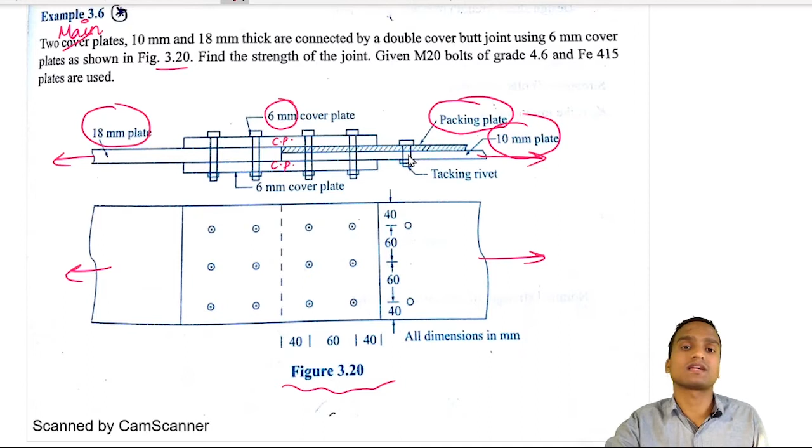The thickness of the cover plate is 6 mm, and the main plate thickness is 18 mm and 10 mm. Since there is a difference in thickness of the main plates, to connect them we have to use a packing plate, as in this special type of joint. The thickness of packing plate, TPK, will be equal to 18 minus 10, which is 8 mm, greater than 6 mm as per the code's recommendation. So we have to apply the factor beta TPK.

This is about the packing plate and the reduction factor which we have to incorporate on the shear capacity of the bolted connection. Now you have to see there are two rows of bolts with 3 bolts in each row, so we have to multiply the design strength of one bolt, which is the minimum of bearing and shearing, with the total number of bolts, that is 6. You have to see all the parameter values given here: 40 is the end distance, this is the pitch, this is the gauge.

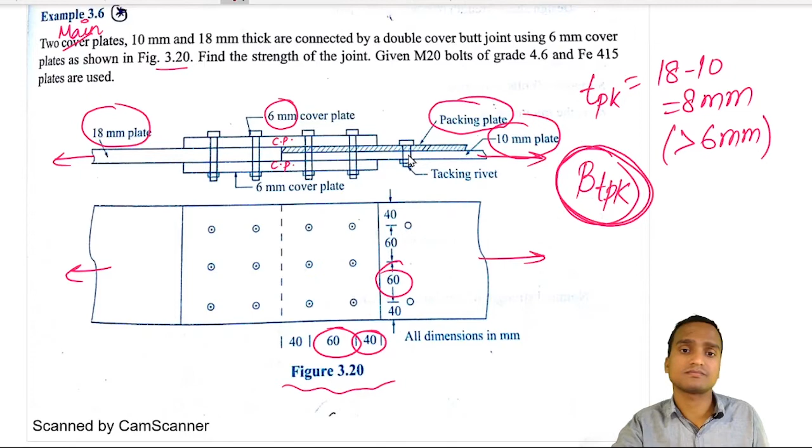After taking this 8 mm thick packing plate, we have to calculate the reduction factor beta pk, given by this formula of the IS code. We multiply it here, reduce it from 1, and it comes out to be 0.9. This beta pk will be multiplied into the formula of shear capacity of the bolt.

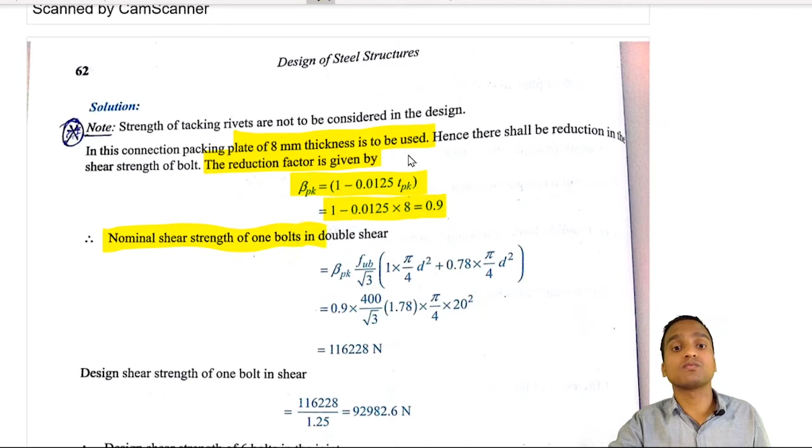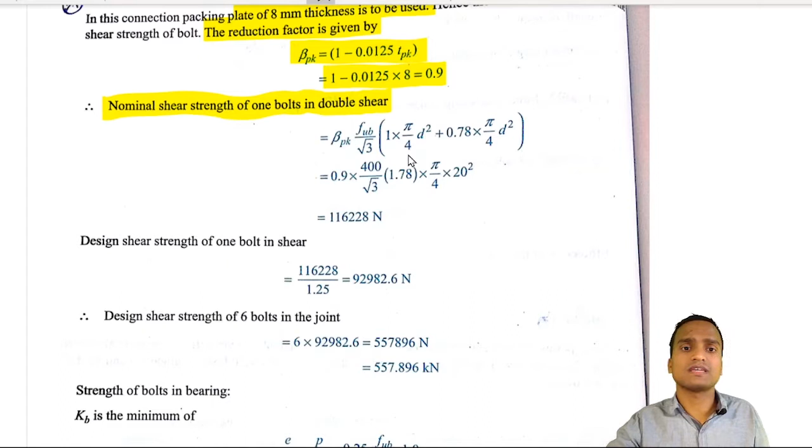Now let us calculate the nominal shear strength of one bolt in double shear. It is not given in the question as such, but you can assume that one shear plane lies in the shank area and one shear plane lies in the threaded area. The same assumption is used here, and VNSF is calculated accordingly with beta pk.

This VNSF is multiplied with beta pk, because we have put beta Lj equal to 1 and beta Lg equal to 1, since for long joints or large grip length these values are not given, so we just put them equal to 1. But we multiply it with beta pk, which is 0.9, and this is multiplied by FUB by root 3 into NN ANB plus NS ASB. So it becomes 0.9 into 400 by root 3 into 1.78 pi d square by 4, which gives this value of VNSF.

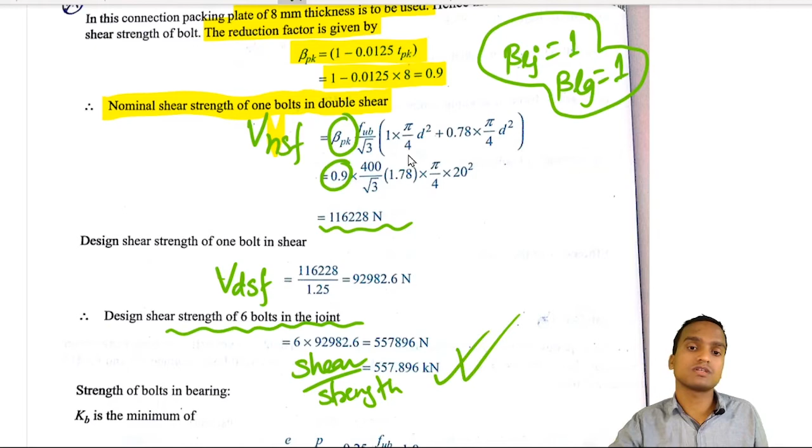This is the nominal shear capacity of one bolt, and we have to divide it by the partial safety factor to get VDSF, the design shear strength of the bolt, then multiply it by the 6 bolts in the joint to get the total shear strength of the joint in shearing. Obtaining this value is not very difficult.

Now we have to calculate the bearing strength of the joint, the bearing capacity of the joint. First we have to calculate the value of kb, which is the minimum of four values. When we put all these values into the four different expressions, the minimum value kb comes out to be 0.606.

We can easily put this into the nominal strength of one bolt in bearing, which is equal to 2.5 kb d t into fu, where fu is fub here. Although here 410 is used, I would suggest using 400 only. We put all the values: 2.5 kb is 0.606, d is the diameter of the bolt, t is the thickness of plate. Now why have we taken the thickness of plate equal to 10 mm?

Because we have to take the minimum thickness of plate. I have told you, if there are two plates of different thickness, then you choose the minimum thickness of plate, because the minimum thickness will give you minimum strength, and this is what you want. You don't want larger strength, you want to determine minimum strength, because the thicker plate will not fail, it will be the thinner plate who will be failing. That's why we have taken the value of thickness equal to 10 mm.

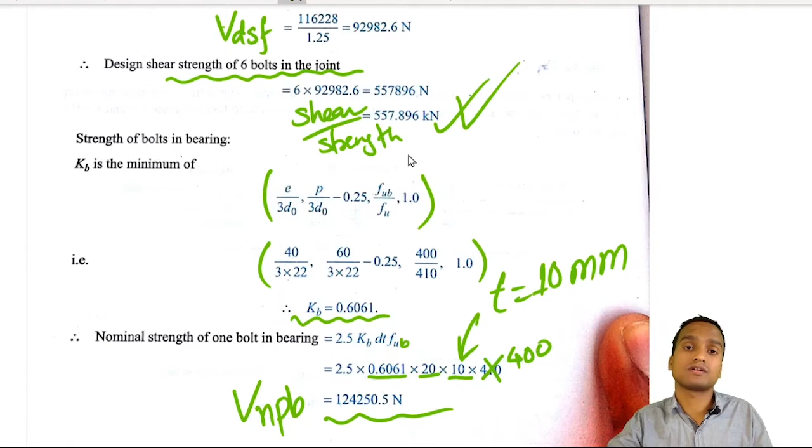Now this is for only one bolt, and also we have to calculate the design bearing capacity of bolt. It is obtained by dividing it by partial safety factor and then multiplying it with the total number of bolts. So this is done, and this is written in kilonewton.

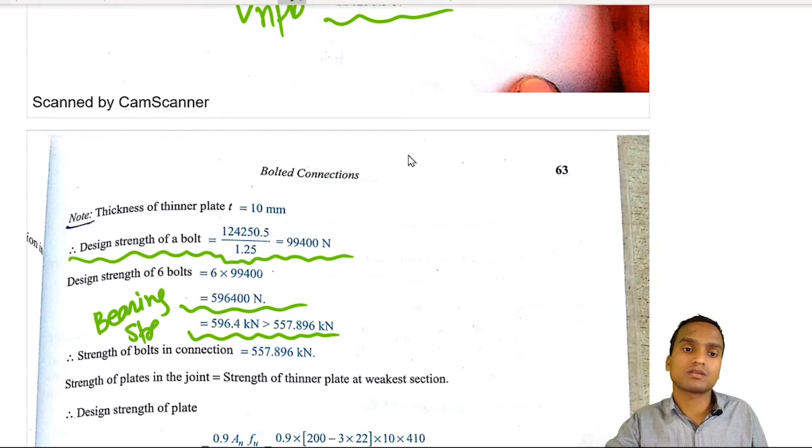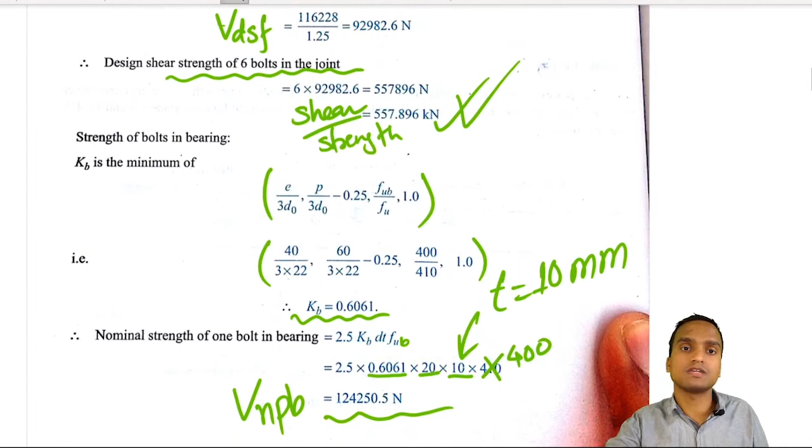Now this is the value of design bearing strength of joint. If you see bearing strength of joint and shearing strength of joint, there is not much difference, but shearing strength of joint is equal to 557 and bearing strength of joint is 596.

So from the comparison we arrive that strength of bolts in connection will be minimum of the two, and it is equal to 557.896 kilonewton. So this becomes the strength of the bolted connections.

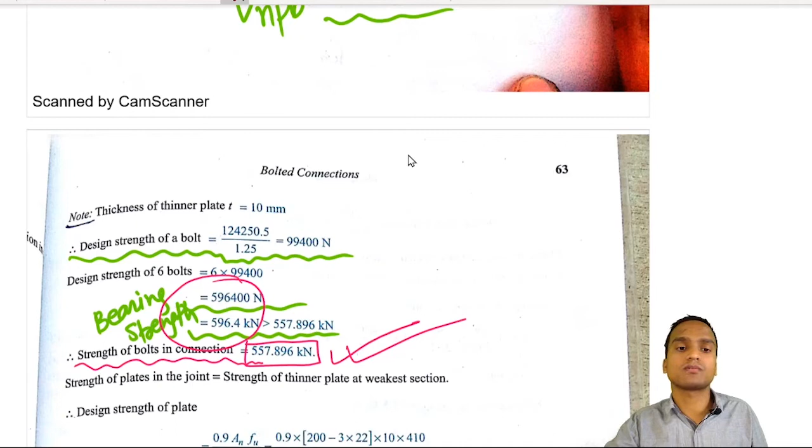Now we have to also calculate the strength of plates in the joint, and the design strength of plate will be equal to TDN. So let us calculate TDN, and TDN is equal to 0.9 AN FU by gamma m.

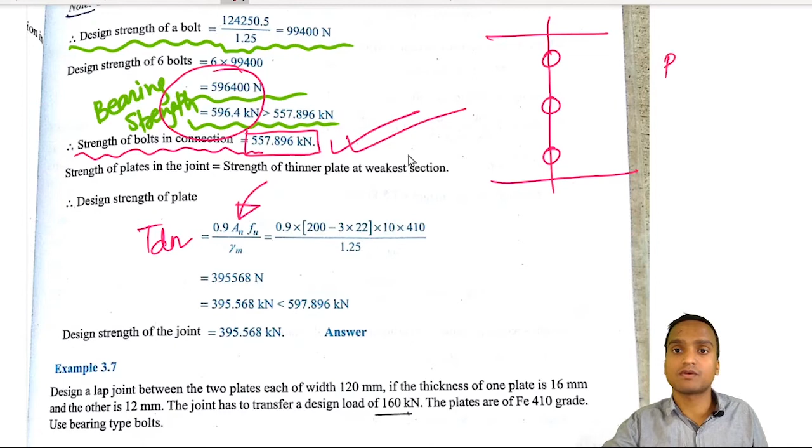Now calculation of this net area of plate is very important, because there are 3 holes done in the plate in one row. So this is a chain bolting, so we will use directly the formula B minus N DH multiplied by the thickness of plate, and here thickness will again be the minimum thickness, that is equal to 10 mm.

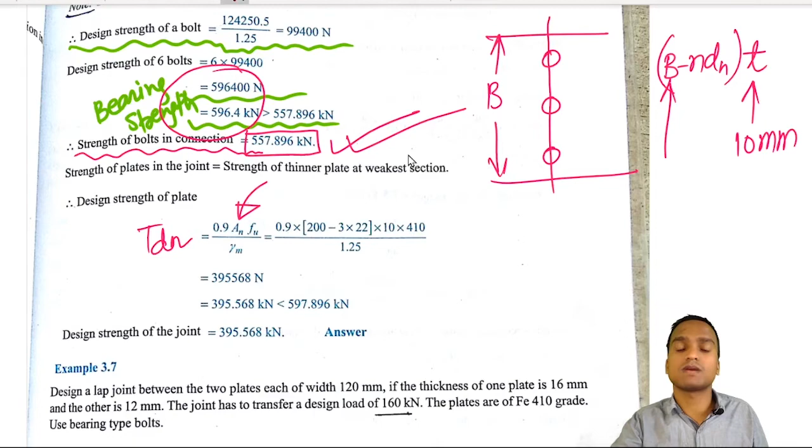And this width B value, how to calculate this value of B? This value of B is given in the question itself. You can obtain this by doing the summation of all these 4 values, and when you do this you arrive at B equal to 40 plus 60 plus 60 plus 40, which is equal to 200 mm. So width of plate is already given.

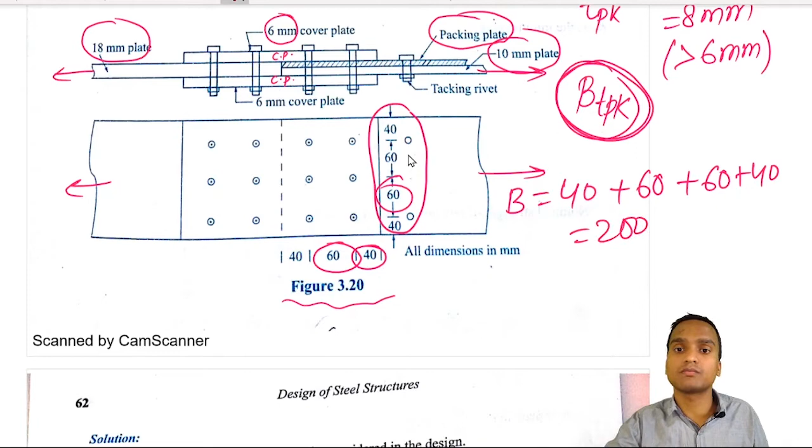Now we have done here B minus N, where N is the number of holes. So B is equal to 200 and N is 3 holes. And what is the diameter of hole? Diameter of hole will be 22 mm, because this is M20 bolt, and we multiply it by 10. So this is my AN value, and the same value is written here. I hope this is clear to you.

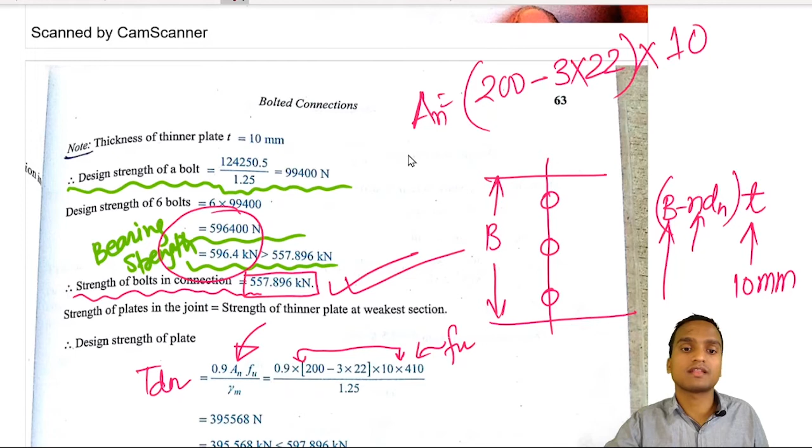And this is the value of FU of plate, not of the bolt, and this is divided by gamma m 1.25, and then you get the design strength of plate.

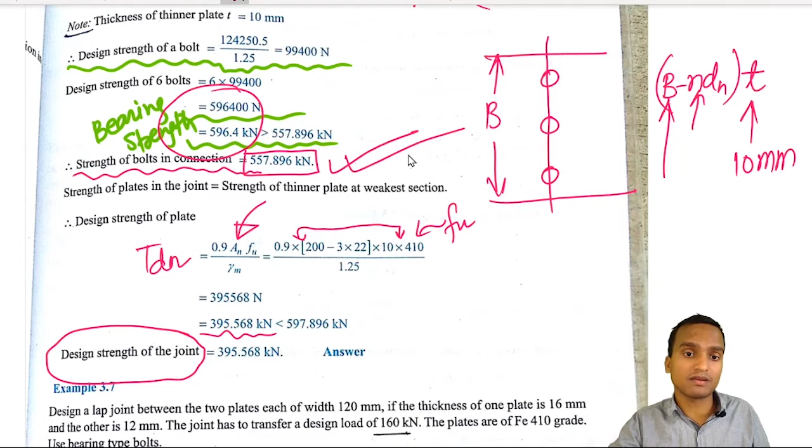Now the design strength of joint will be the minimum of design strength of plate and the design strength of bolt. So if we do a comparison between this 557 and 395, we arrive that it is minimum, so this becomes the strength of joint.

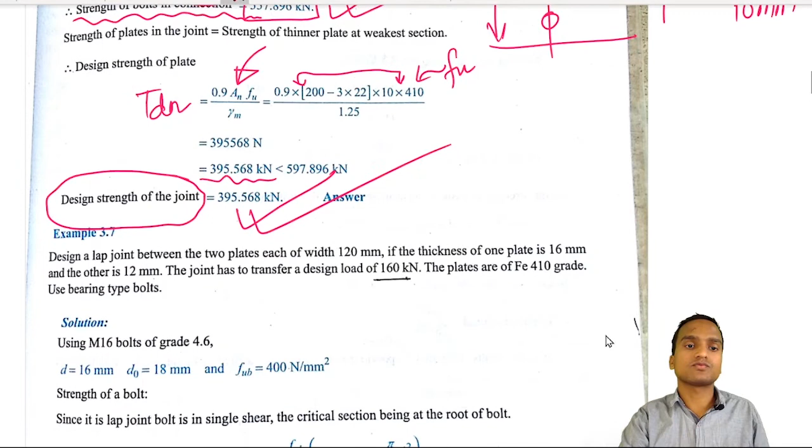Okay, now let us come to our second numerical, and in that it is asked to design a lap joint between 2 plates each of width 120 millimeter, and thickness of one plate is 16 mm and the other is 12 mm.

Now this type of joint is a lap joint. So in lap joint you provide one plate like this and other plate like this, and there is no use of cover plate as such. So you can directly do the punching work and provide the holes and then provide nut and bolts here. So this is what is done in the lap joints.

So here in this case, although the thickness of plates are different, this is a 16 mm thick plate and this is a 12 mm thick plate, do not ask me to use packing plate here again, because packing plate will be used in butt joint, not in the lap joint.

Now the joint has to transfer a design load of 160 kilonewton, this should be the design load. The plates are of Fe 410 grade. Use bearing type bolts. Now it is also given, although it comes in the solution, that we are using M16 bolts of grade 4.6, or you can assume also, because this is a design problem, isn't it? Because here it is asked to design a lap joint.

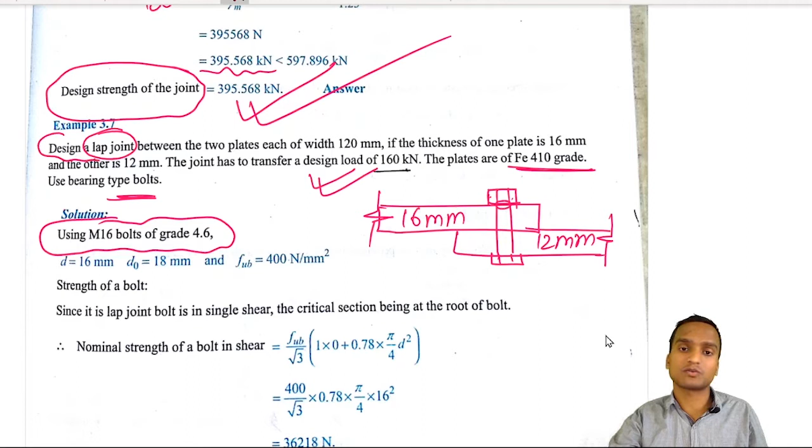So how many types of problem can be?

It can be two types of problem: analysis problem, in which everything is given, you just have to analyze it and calculate the capacity of joint. Second type of problem can be design type, and in that you will be given the design load and you have to design the joint. It depends on you what type of bolt you want to use, what grade and what diameter bolt and what gauge and pitch you want to provide.

It depends on you. So in this case we have just directly used M16 bolts of grade 4.6. So diameter D is 16 mm, D naught is 18 mm and FUB is 400 Newton per mm square. All these things should be clear by now, so I am going a little fast.

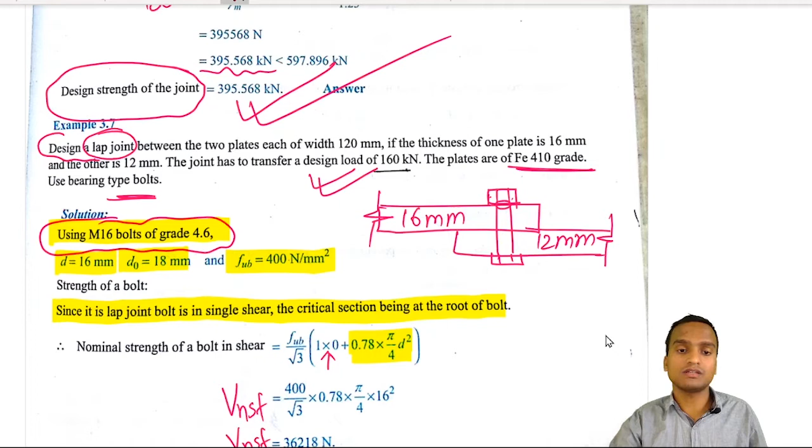Since it is a lap joint, the bolt is in single shear, and the critical section is at the root of the bolt. Normally we assume that the critical section lies in the threaded portion, because the threaded portion is weaker. That's why we put 0.78 pi d square by 4, and area of shank region is put directly to 0, because this is single shear, and this is the value of VNSF, calculated in Newton. Now after calculating it, we have to calculate design shear strength. This is the design shear strength of one bolt.

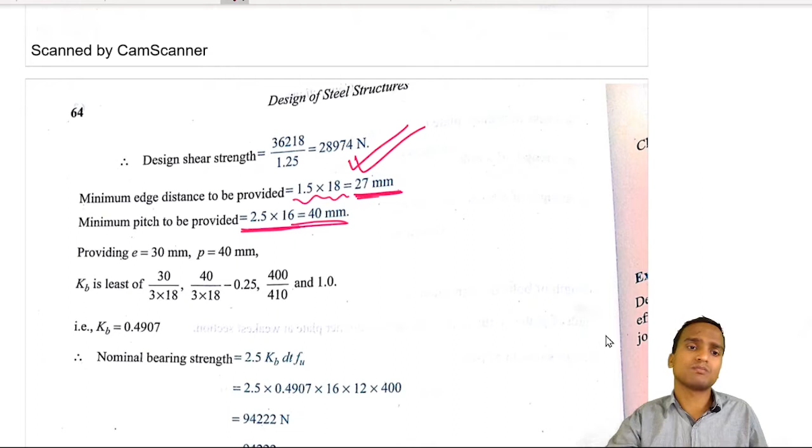Now from the detailing we can take minimum edge distance that we have to provide as 1.5 D, which comes out to be 27 mm, and minimum pitch to be provided is 2.5 D, which comes out to be 40 mm. This comes by experience also.

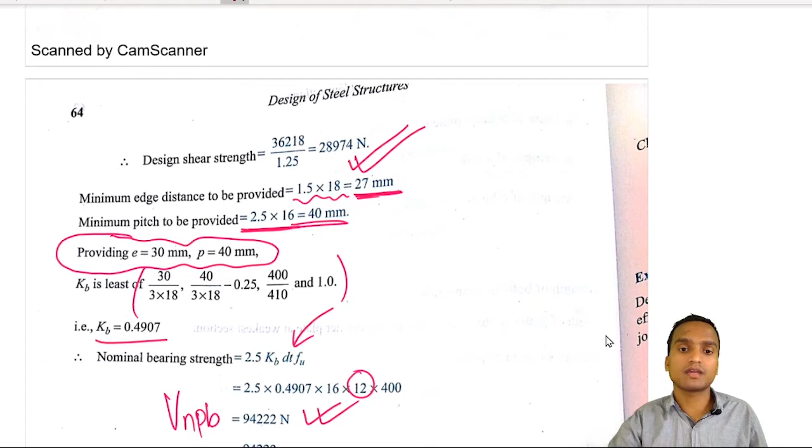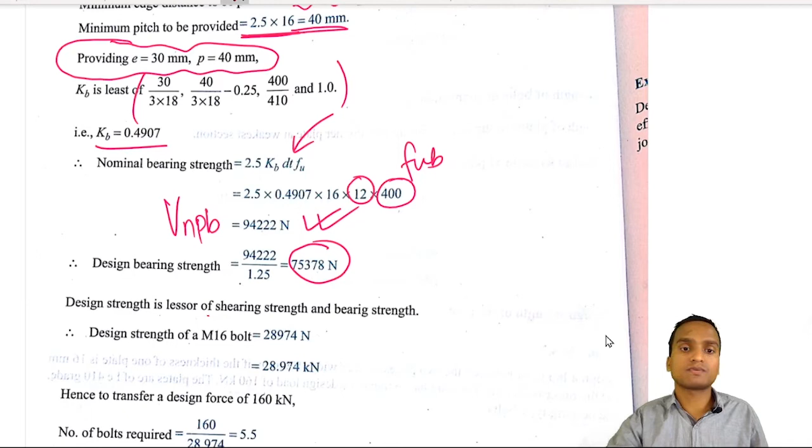So if we provide this value of end distance and pitch, then the value of bearing strength can be obtained. First of all we have to calculate the value of KB. KB is minimum of these four values, which comes out to be 0.49, and when we calculate VNPB, it comes out to be this, using the minimum thickness of plate, that is equal to 12 mm, and FU is the FUB here. So design bearing strength of one bolt is also calculated, and the minimum of shearing strength and bearing strength comes out to be this.

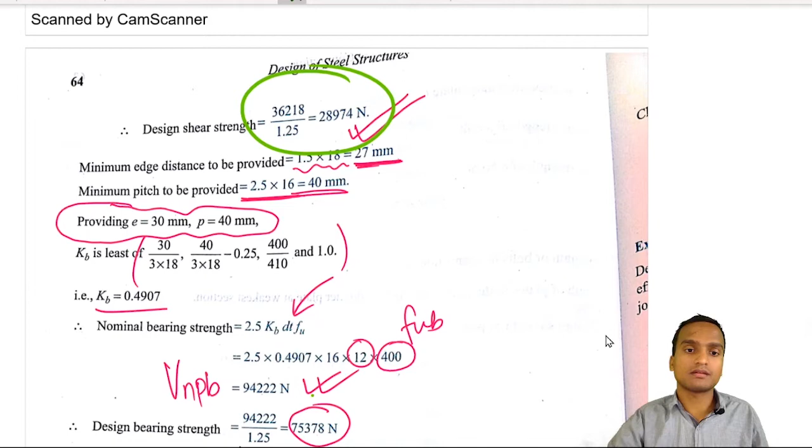You can see, you can do a comparison. This is my shearing strength and this is my bearing strength. Which one is minimum? Shearing strength. So that's what we have taken here as the design strength of one M16 bolt, written in kilonewton.

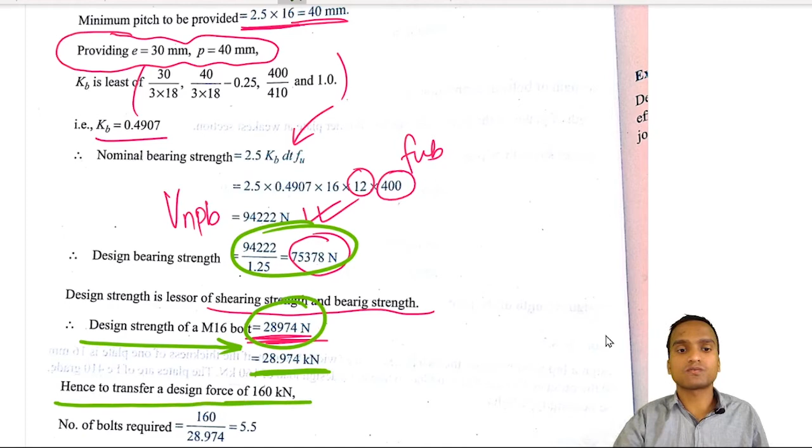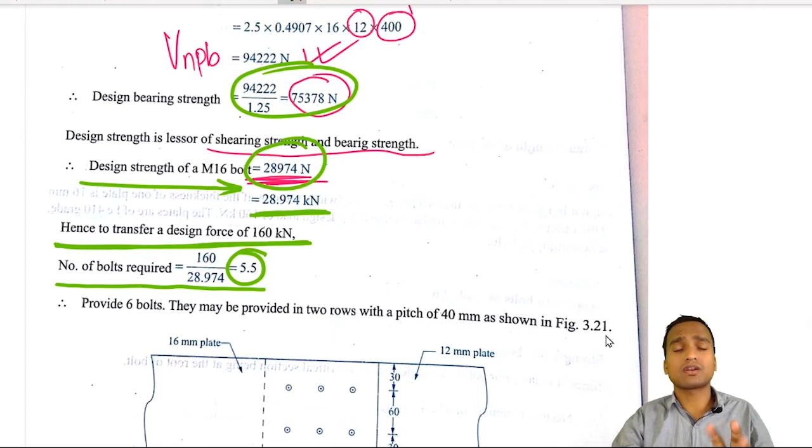Now to transfer a design force of 160 kilonewton, how many bolts do I have to provide? The number of bolts required will be equal to the total amount of load to be transferred divided by strength of one bolt, and it comes out to be 5.5. So we can round it off to 6 bolts.

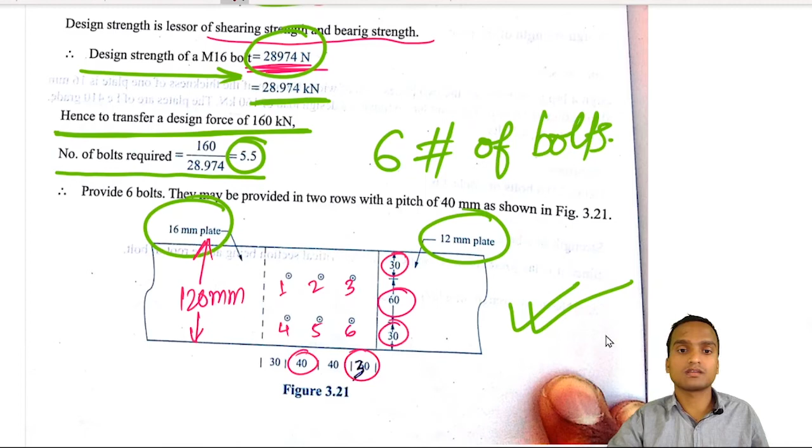So this is a lap joint, and this is how we draw the top view of lap joint. The dimensions are shown here, 16 mm plate and 12 mm plate, and the width is also given in the question, that the width is 120 mm. So 60 mm gauge and 30 mm edge distances are kept, and these are bolt numbers 1, 2, 3, 4, 5, 6, and this is pitch and this is end distance. So this is how the joint is designed.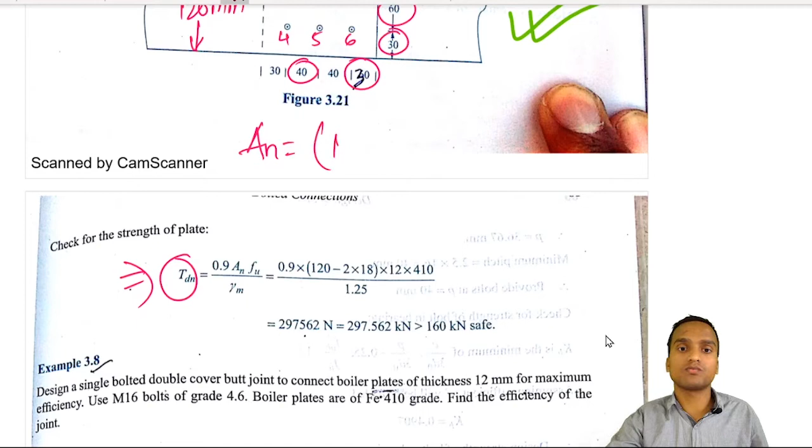Now we also check for the strength of the plate, and the strength of the plate is calculated by TDN, equal to 0.9 AN FU gamma m. Now the most important is AN, and AN will be equal to 120 minus, since there are 2 holes in the critical section, so we subtract 2 into, and since M16 bolt is used, diameter of hole will be 18, and this has to be multiplied by the minimum thickness of plate. Nothing much to explain, and this is the FU of plate, not the bolt.

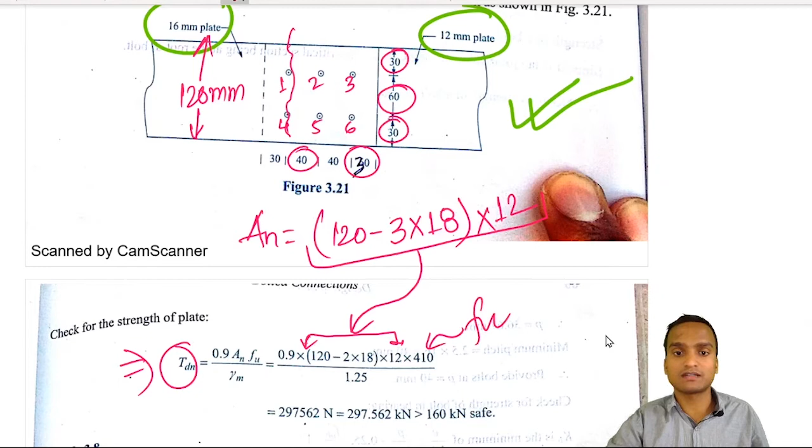And when you do this, you calculate that TDN is even more than what we have designed for, 160 kilonewton. So you need not worry, you have taken the minimum side, and that is the safer side.

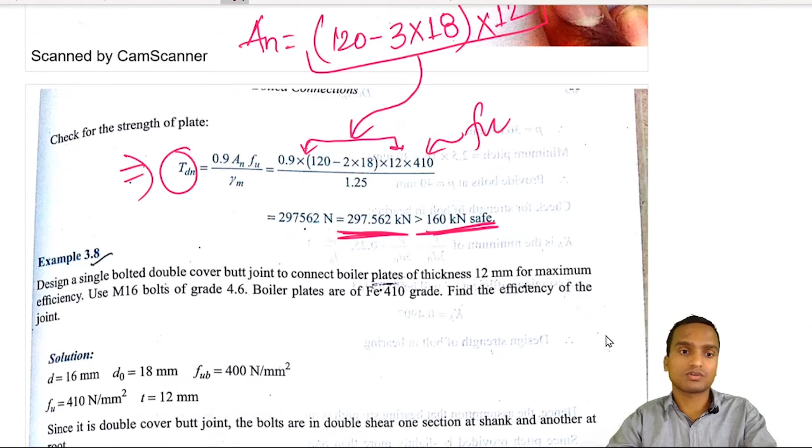Now at the end we come to eccentric connections, eccentric connections with bearing bolts when load is in the plane of group of bolts. Eccentric connections are different connections, and we have also discussed that lap joint is a case of eccentric connections. So here I have taken one case of eccentric connections, using bearing bolts, normal ordinary black bolts, when load is in the plane of the group of bolts. You have to visualize the diagram which I am going to show you.

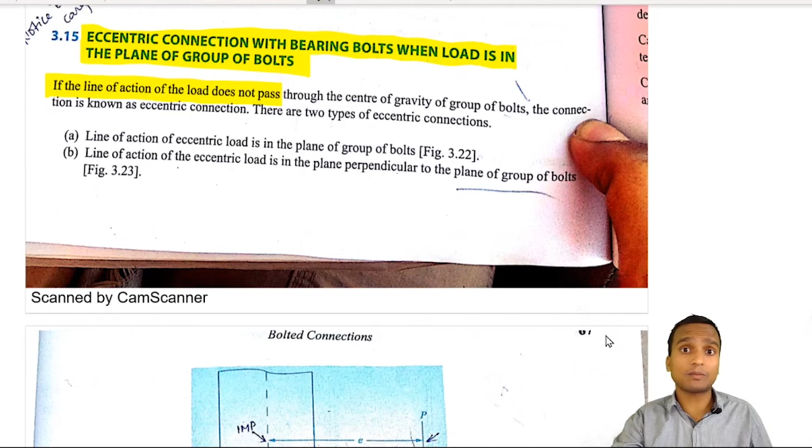This is explained as, if the line of action of the load does not pass through the center of gravity of a group of bolts, the connection is said to be an eccentric connection. So there is a plane of bolts forming a group, and there must be a center of gravity of that group. If the loading does not pass through that center of gravity, but instead passes through the same plane with a little distance, that distance is called eccentricity, and such a connection becomes an eccentric connection.

So the first case can be that the line of action of the eccentric load is in the plane of the group of bolts, or the second case can be that the line of action of the eccentric load is in the plane perpendicular to the plane of the group of bolts.

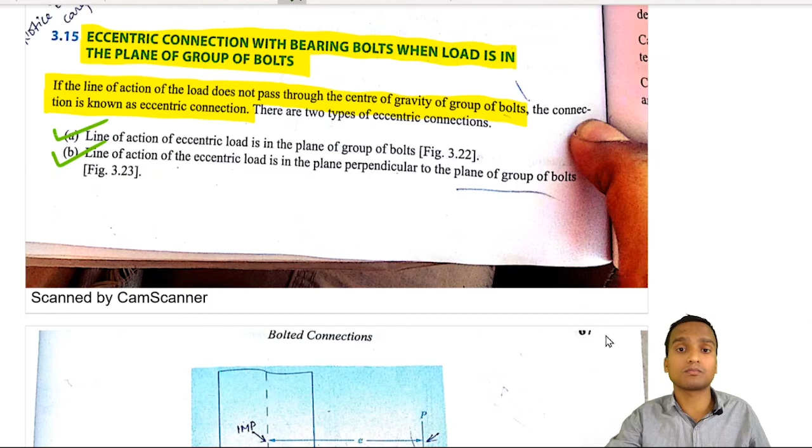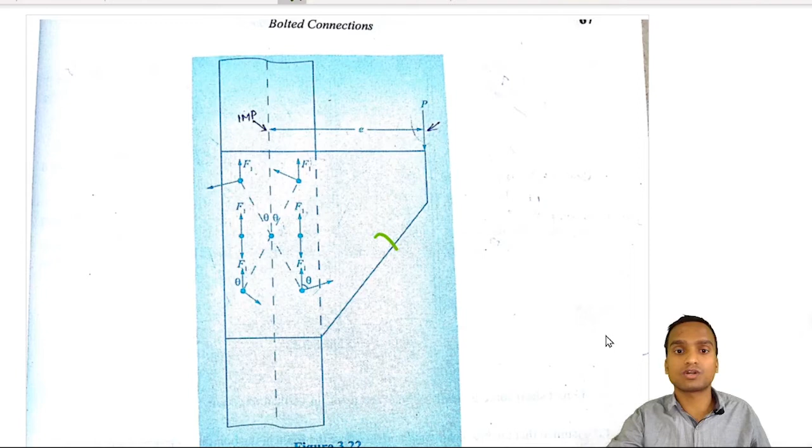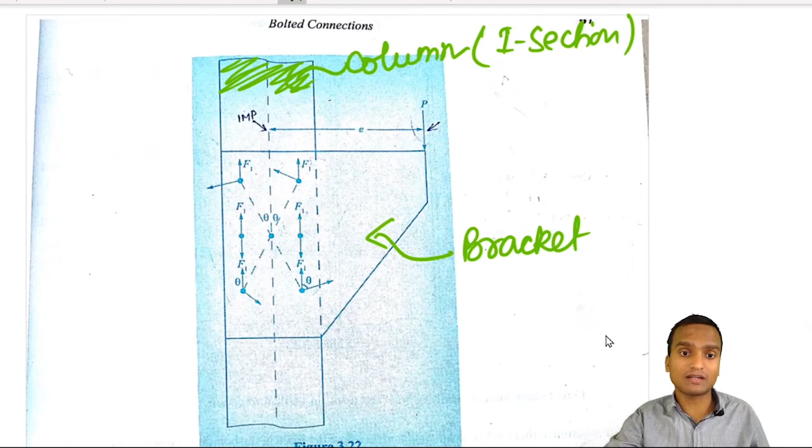We have taken the first case here to understand, and this is a bracket shown here. This is a bracket, and on this bracket we can run another beam also. This is my column, made with an I section. I section, which I have already explained, is also known as a beam, but it can be used for making columns also. This is the flange portion of the I section, and this dotted line is the web portion, so you may not be seeing it clearly. Now on this I section I have connected a bracket with the help of 6 bolts.

So when we use a beam on this bracket, the transfer of load from the beam comes to this point, and here it is the support of the beam, so it is the normal reaction coming from the beam. So this is the force coming on the bracket, and this is at a distance of E, eccentricity, from this center of gravity.

Now this P is resisted by the group of bolts by two forces. One is the linear force, which resists P, and the other is radial forces which resist the moment, which is equal to P times E. So first there is the simple force F equal to P, and then there is the moment P times E. So on each of the bolts, if you see, there is one force F1 in the opposite direction of this P. P is acting downward, so F1 is acting upward on each of the bolts.

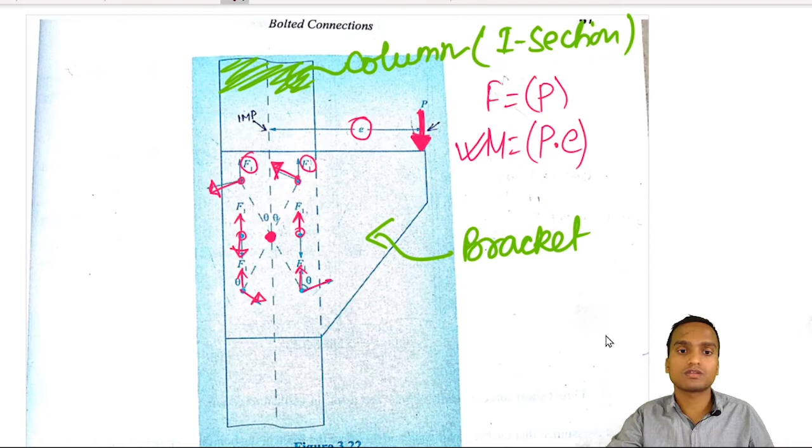Sorry, there are 6 bolts. This was not the bolt, these are the bolts, and on these also forces are shown in the upward direction. Then this moment is resisted by a radial force, which acts along the centroid, and at all the bolts this is the radial direction of forces, normal to the radius. This diagram must be clear to you for understanding the analysis of forces.

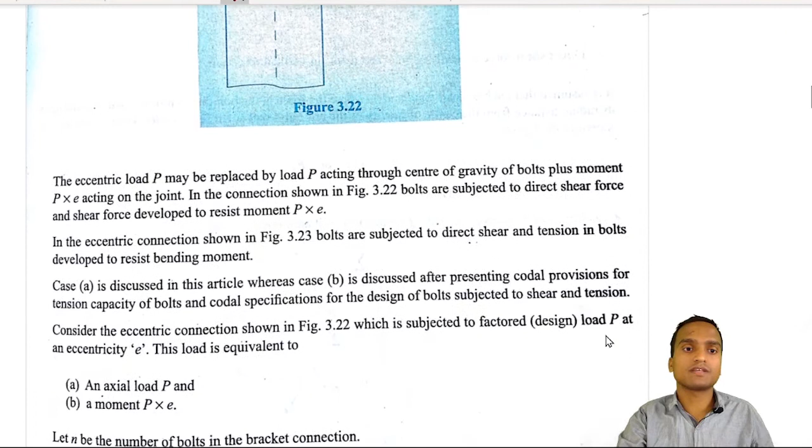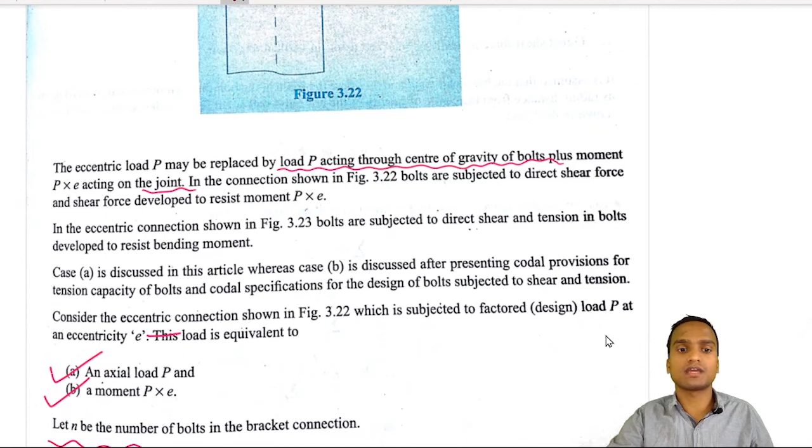So by now we can easily do simple comparisons, and we see that the eccentric load P may be replaced by load P acting through the center of gravity of the bolts plus moment P times E acting on the joint. The bolts are subjected to direct shear force, and shear force is developed to resist the moment PE. So the load is equivalent to one axial load P and a moment PE. If there are n number of bolts in the bracket connection...

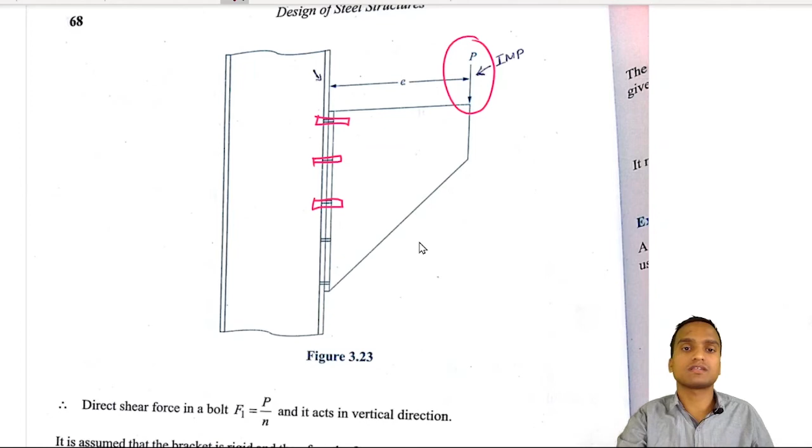But we are now discussing only the first case, and in that case the direction of F1 is opposite to the direction of force P. This F1 acts on each of the bolts, in the opposite direction of P. So the value of F1 on each bolt will simply be equal to P by N. If there are n bolts, F1 will equal P by N, and it acts in the vertical direction. It is very simple to understand.

Now it is assumed that the bracket is rigid, and therefore the force in a bolt due to moment will depend upon its radial distance from the center of gravity of the bolt group and will act at right angles to the radial lines.

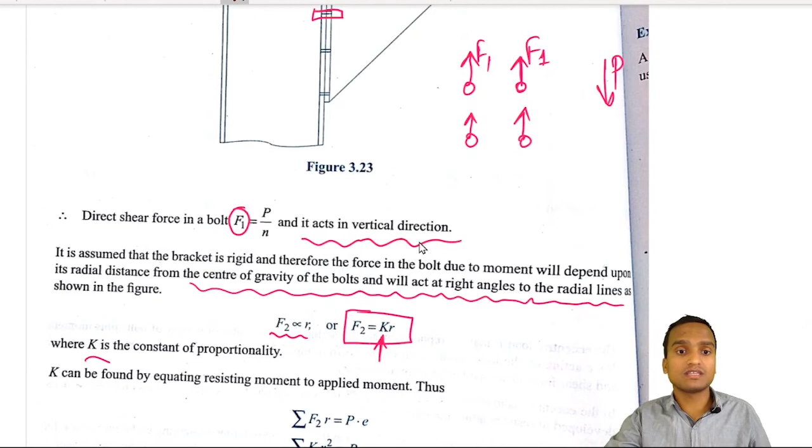F2 is directly proportional to radius, so F2 equals K times R. If we remove this proportionality sign by introducing a constant K, then K is the constant of proportionality, and K can be found by equating the resisting moment.

The moment applied by the eccentric load P is equal to P times E. So when we take the summation of all moments due to the radial force, this equals the summation of F2 multiplied by the radial distance from the centroid, which equals P times E. This equation must be clear to you.

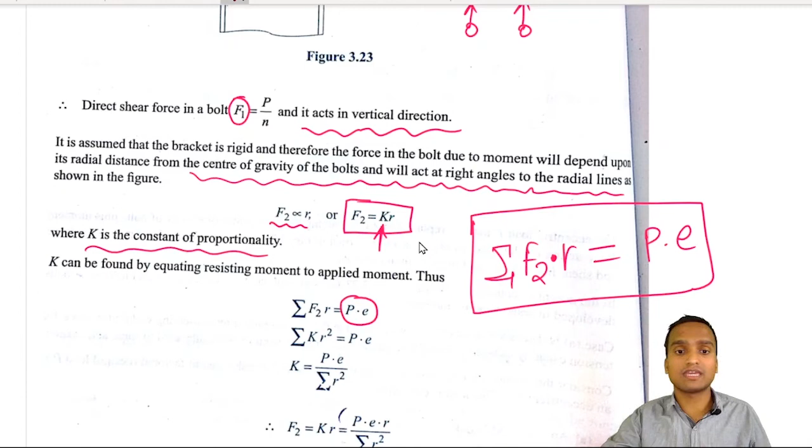F2 is K into R, so it becomes summation of K R square, and this is equated as summation K R square equals P times E. So to get the value of K, it comes out of the summation series, and K can be written as P times E divided by summation of R square.

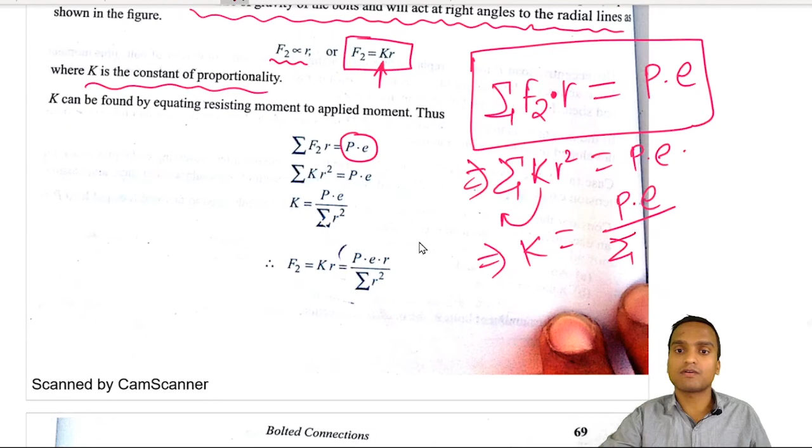So this is the value of K. Now we can calculate F2. F2 equals K times R, and we can directly substitute the value of K here, which is P times E divided by summation of R square, multiplied by R. So this is the value of F2.

F1 we have already calculated, it is equal to P by N. So both F1 and F2 have been calculated on one bolt, and both these forces are in the same plane because P is in the same plane, not perpendicular. So we have to take the resultant force.

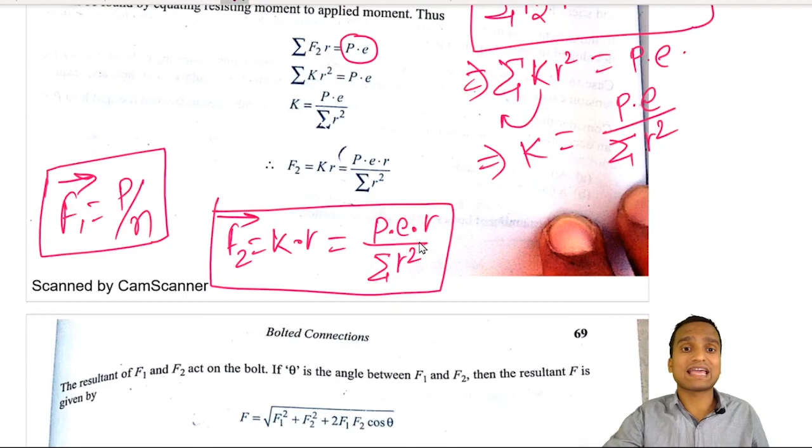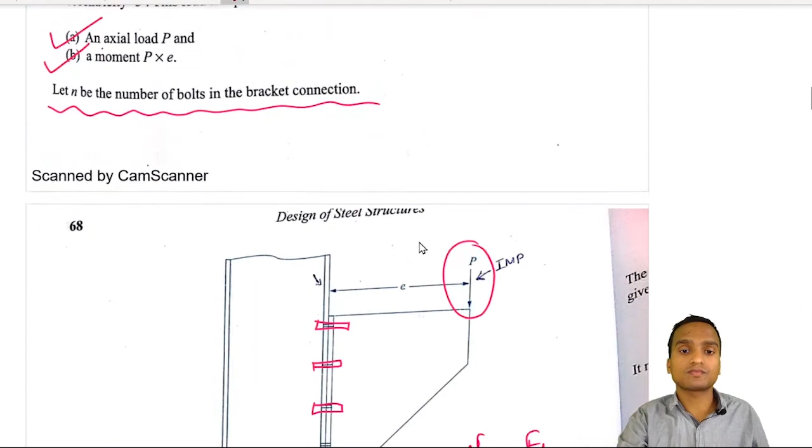How do we calculate the resultant force on a vector plane? We do the vector summation of two forces, because F1 is a vector and F2 is a vector, and there is an angle theta between the two forces, as seen in this diagram. This theta is considered in the vector summation, and this gives us the resultant force F.

The magnitude of the resultant force F is given by root under F1 square plus F2 square plus 2 F1 F2 cos theta, and this magnitude of F must be greater than the design shear strength of the joint. What will be the design shear strength of the joint?

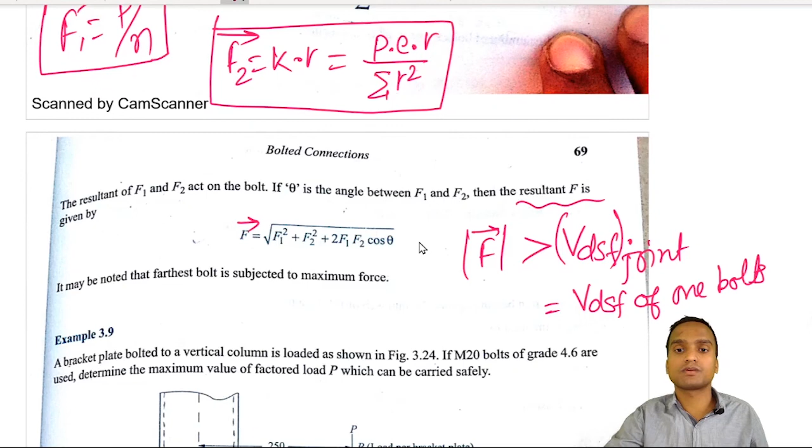It will be equal to the design shear strength of one bolt multiplied by the number of bolts. There were 6 bolts in that connection, and we have to check this. It may be noted that the farthest bolt is subjected to maximum force.

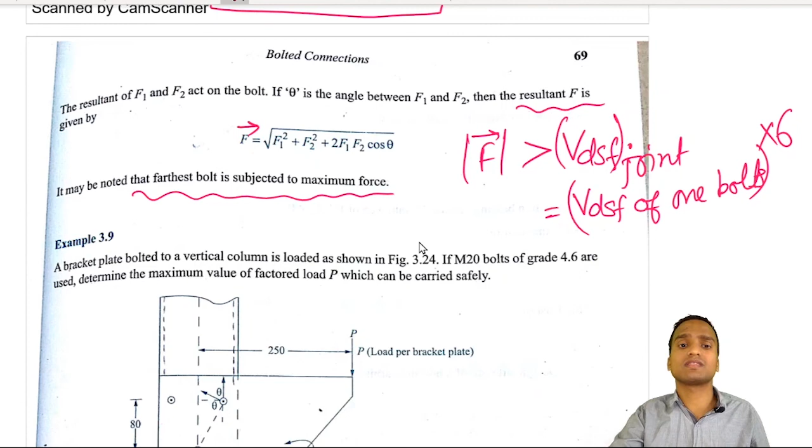So this is how we do the analysis of eccentric connections. There are also many cases of eccentric connections when the loading is in the perpendicular direction, which can also be discussed, because in that case tensile forces also develop on the bolt.

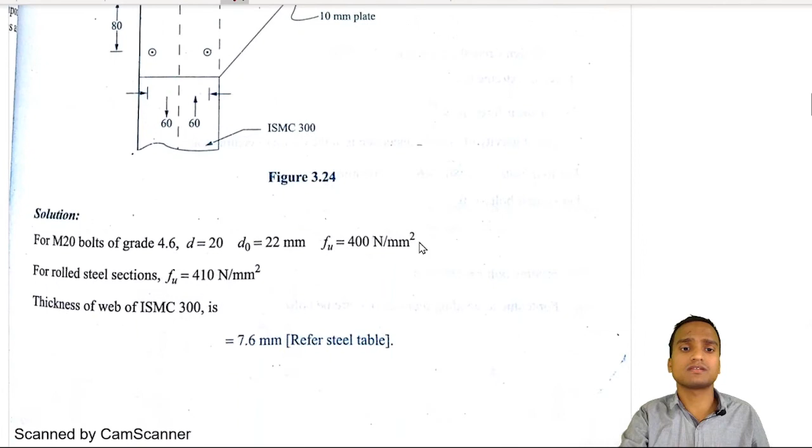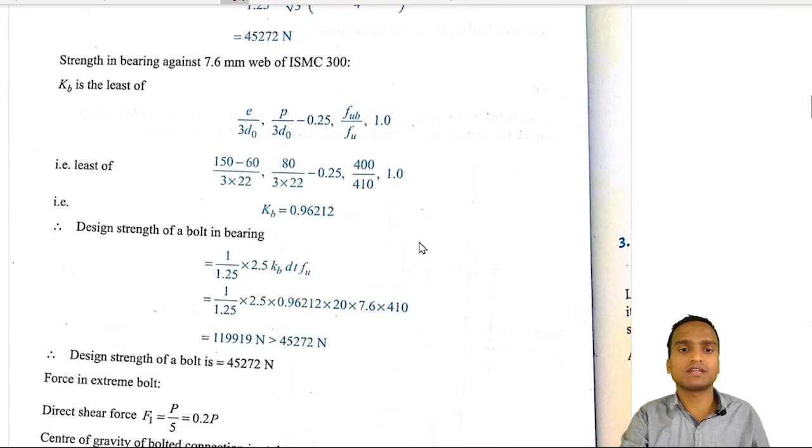But here a simple numerical is done for eccentric loading in the same plane. You can see the design strength of bolts in shear is calculated and bearing is calculated, and then we have taken the minimum value of both the shearing and bearing strength, and it comes out to be this value.

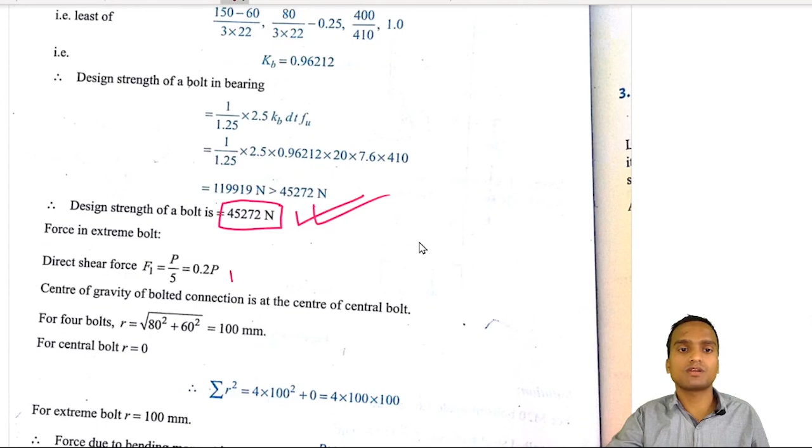So first we calculated the force in the extreme bolt, F1 equals P by N, and in this case there are only 5 bolts. Then we have also done the summation of R square, and when we put it in the formula for F2...

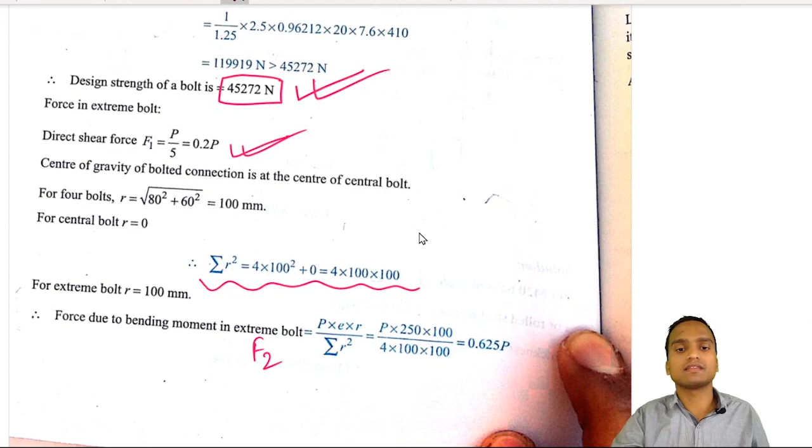...it comes out to be this value, and the summation of F1 and F2 is done here, with cos theta, giving the total shear force coming on the extreme bolt, because the forces on the extreme bolt will be maximum. So this is the extreme bolt which is subjected to this value of total shear force.

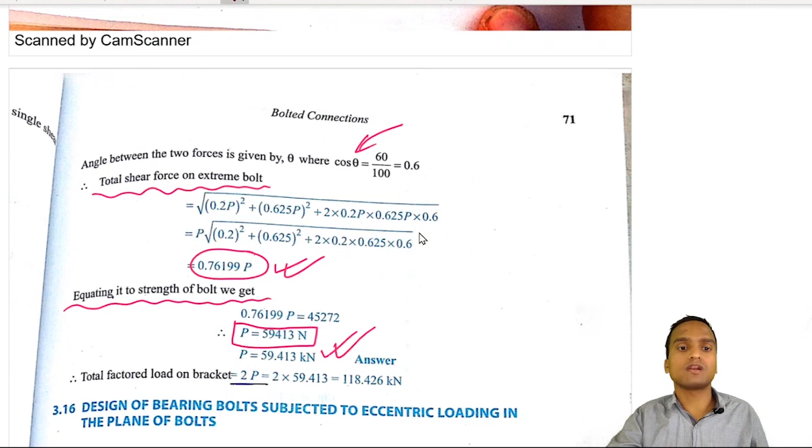Now we equate it to the strength of the bolt obtained from simple calculation, and to satisfy this, the P value must be equal to 59 kilonewton. The total factored load on the bracket will be equal to 2 times P, because there are 2 brackets, one on each face of the column.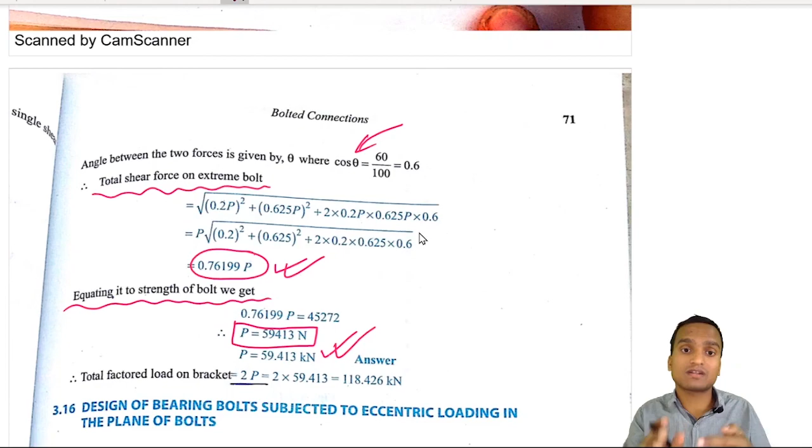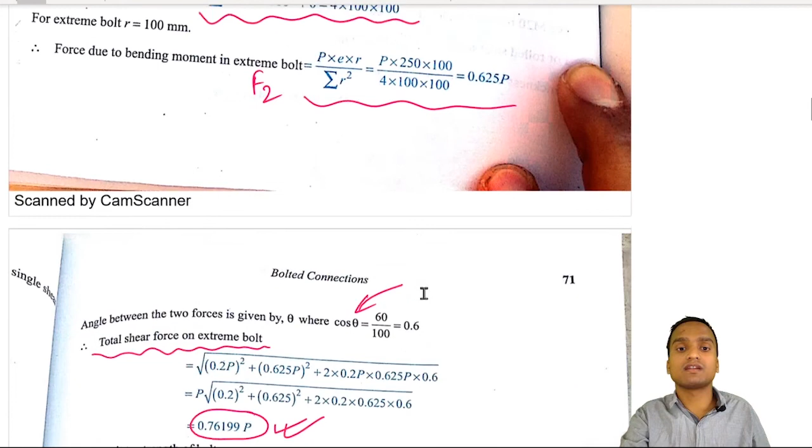We are seeing one bracket from the front side, but there is another bracket on the back side which we are not seeing in this diagram. So there are 2 brackets, that's why the final load calculation is done as 2P, and this is the total value of P which the bracket can easily hold.